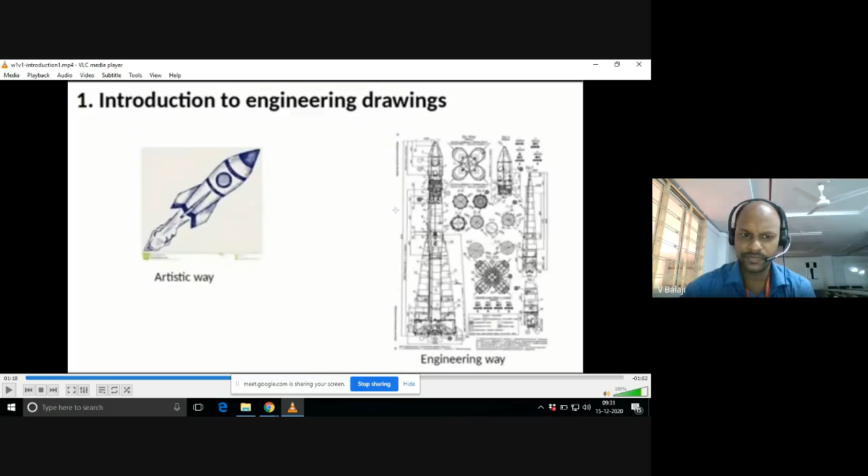Next we will see some other components. You might have seen a space station, right? There are so many things there. Suppose if you take a Skylab - internally there are a lot of parts.

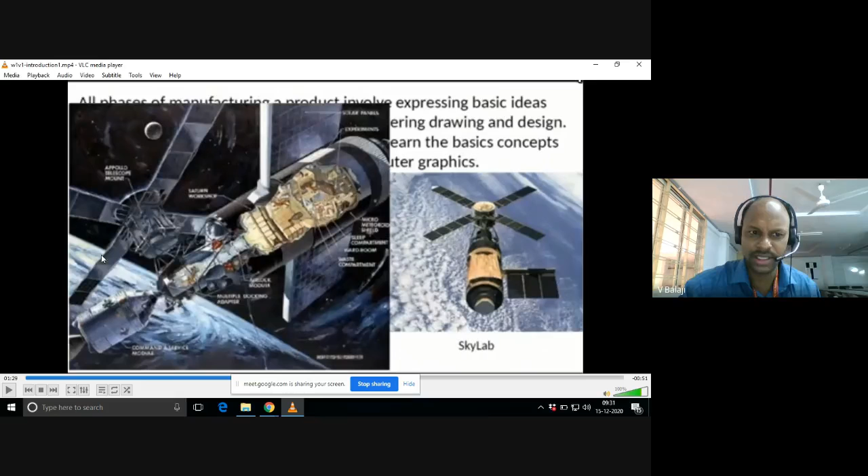Now wind farm - there is a big pillar type structure and three different blades. How much height it must be erected? What is the length of the blade? Thickness of the blade? Everything you need to prepare in detail on the drawing sheet. Then only it can be sent to the manufacturing department so everybody will easily understand in the workshop and go for manufacturing.

Now I wanted to read a few important lines. All phases of manufacturing a product involve expressing basic ideas into graphical format. Whatever is in our mind, we need to express it on paper - that is the graphical format. That's why we call it engineering graphics.

Widely known as engineering drawing. Nowadays it is engineering graphics. The present course prepares students to learn basic concepts involved in technical drawing skills and computer graphics. Whatever we are learning is nothing but preparing technical drawings. You will develop some skills, and you can also use computers - computer graphic skills you can develop in this subject.

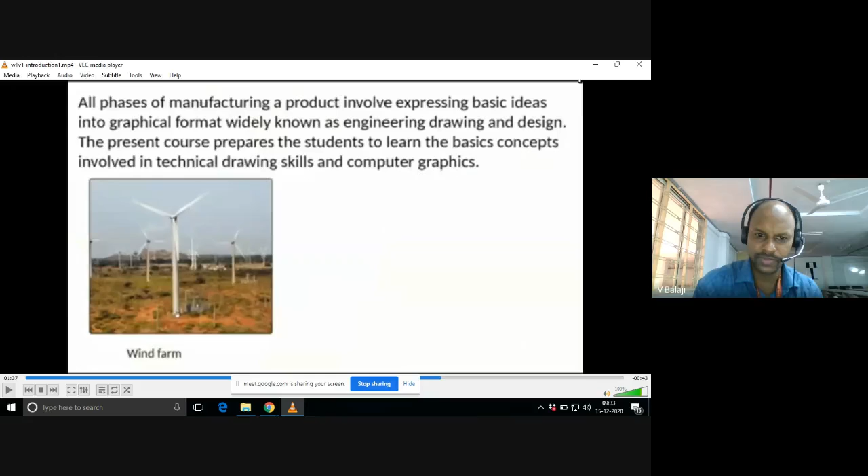Now I am showing you one more thing here - there is a wind turbine inside this particular windmill. Again, in the turbine you will find so many internal components, more than 10,000 components. Can you believe this? More than 10,000. So you need to generate manufacturing drawings with the help of some data.

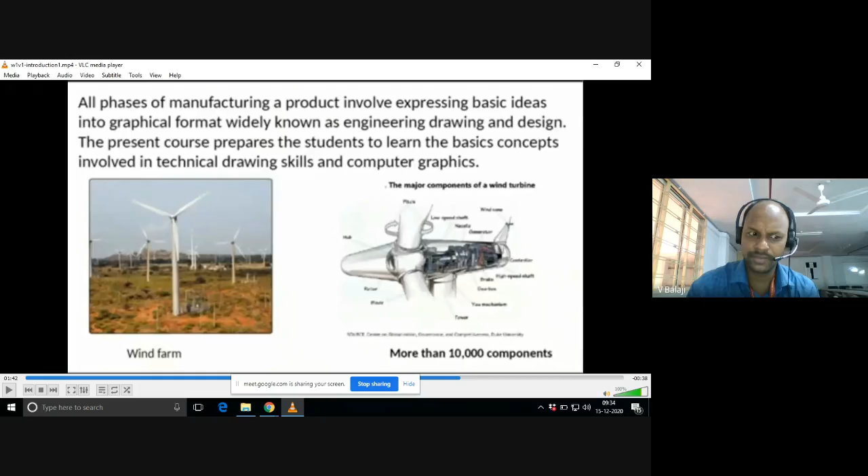Thereafter you can find some bridges. One bridge I am showing you here, which is the Bandra Worli Sea Link, Mumbai. You can see the detailed drawings here.

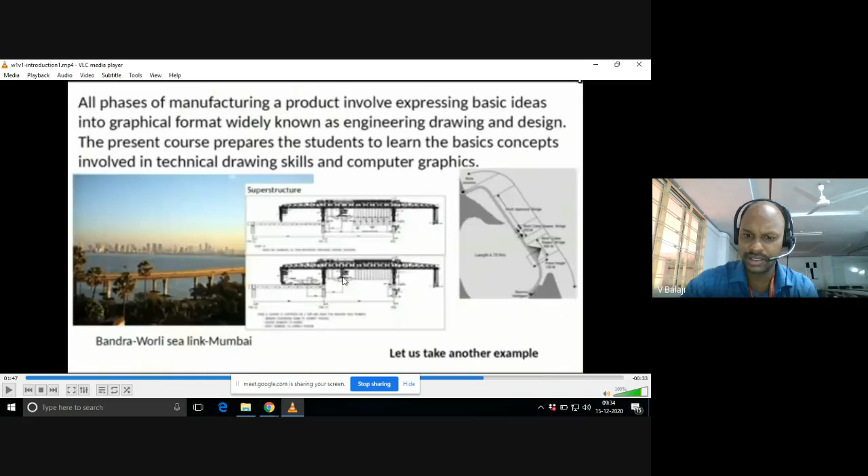Here is one more statement I would like to read for you. During this course, students will develop skills on understanding engineering drawings used in industries, computer design and development of 3D objects, and exposure to visual aspects of technical drawing. Visual aspects means what is front view, pictorial view, side view, top view - I have already discussed this - and other things reflected on the drawing sheet are known as visual aspects.

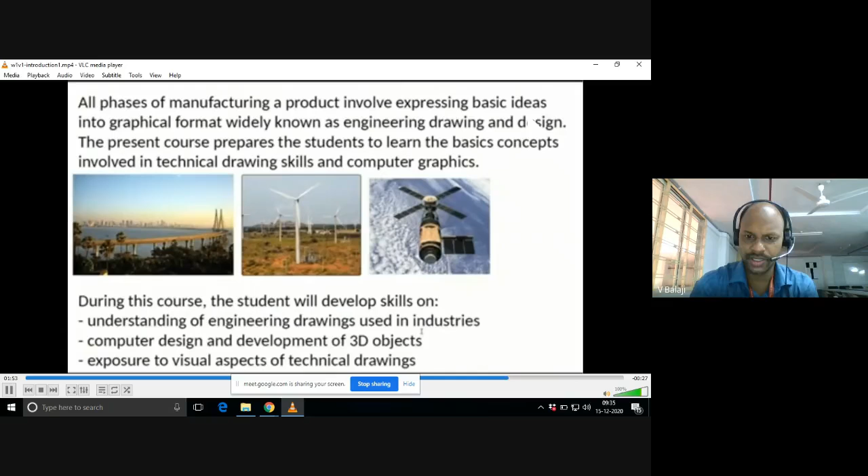I hope you would understand these important points. Do you have any questions here? No questions?

Sushmita asked: Sir, by which time should we buy all the instruments, sir?

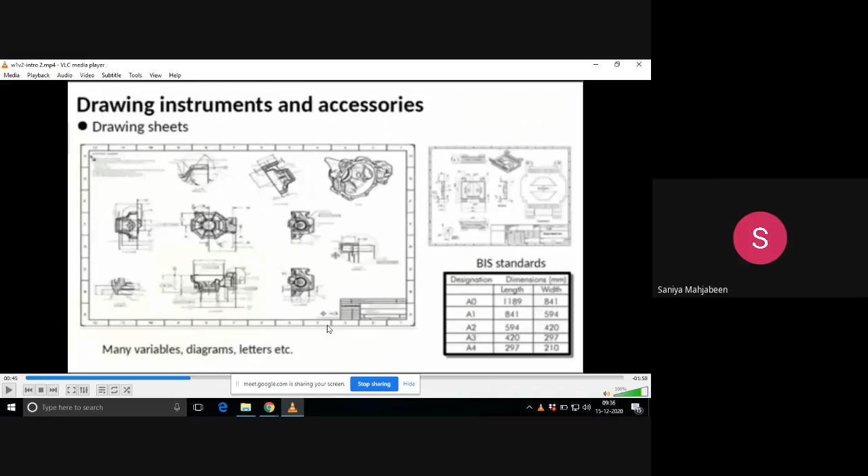Today you'll learn something about drawing sheets. The drawing sheet looks like this, and there are standards for drawing sheets set by the Bureau of Indian Standards. The designations of the drawing sheet are A0, A1, A2, A3, A4. You are familiar with the A4 drawing sheet.

If you go for a Xerox, in the Xerox shop, you can find this ordinary paper of 297 by 210 millimeters. All dimensions here I am showing in millimeters. In general, in our drawing, whatever I say, if I say 100, that means millimeters by default. So A4 is 297 by 210, A3 is 420 by 297, and A2 is 594 by 420, like that.

Now there is a relation between A3 and A4. A4 length is 297, and width is 210. But if you go to A3, the length is 420, which is exactly double the width of A4. See the relation here. And the width of A3 is nothing but equal to the length of A4.

You see the relation in the diagonals. So the length of A3 is double the width of A4, and the width of A3 is equal to the length of A4. Like that, the relation continues. You see, 297 to 594, and 594 is equal to 594. Again, 420 doubled is 840, like that. That means there is a relation between the sheet sizes.

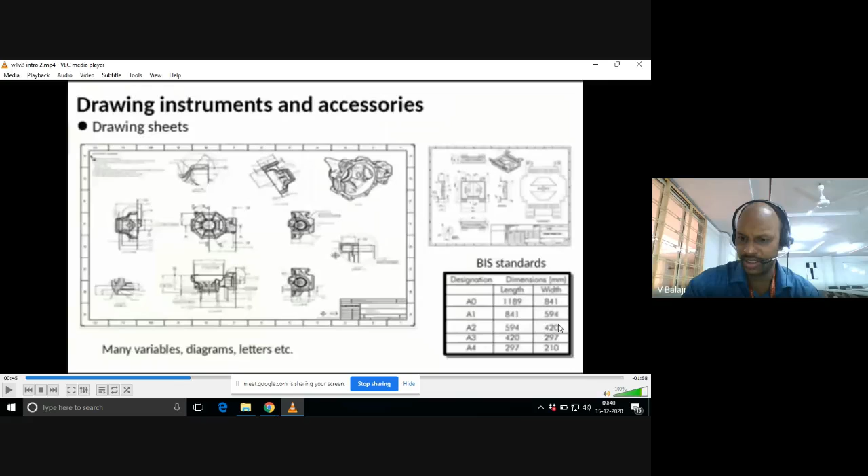The drawing sheet is in this rectangular shape, and there is a title block here. You need to write your roll number, name, date of drawing, and name of the drawing you are drawing on the sheet, on that particular day. So those things we will discuss in detail later.

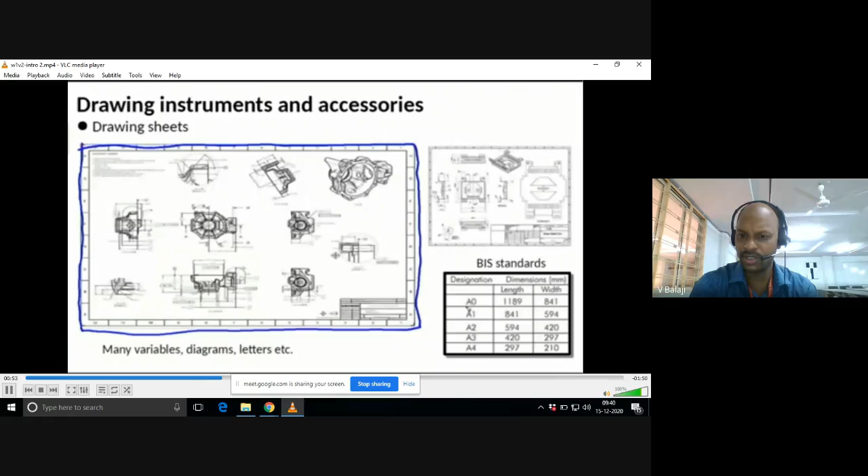So remember, these are the outline dimensions of your drawing sheet. Now I will show you: this total length is 1189, the total width is 841. Now whatever I am showing you here is of what size? What is the designation of this sheet? A0. Very good. But in our regular practice, we use A2 only.

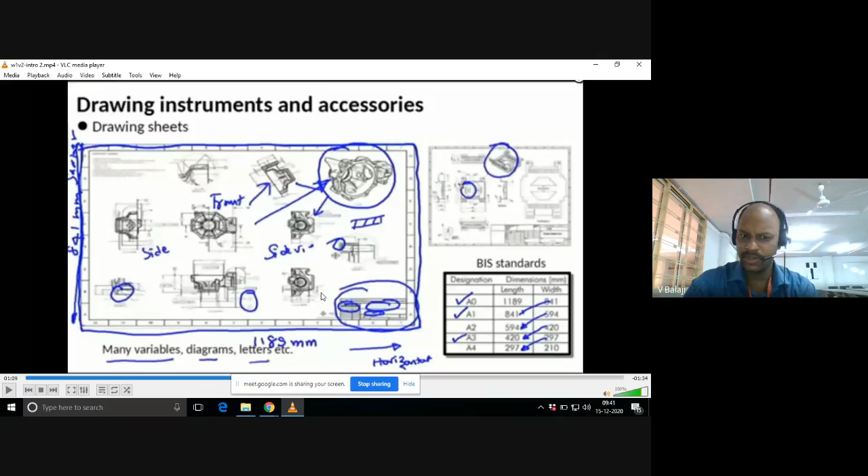A2 only. So there are so many applications, right? Engineering students, one application. For industry, people may use A0 size, like that. That varies, that depends.

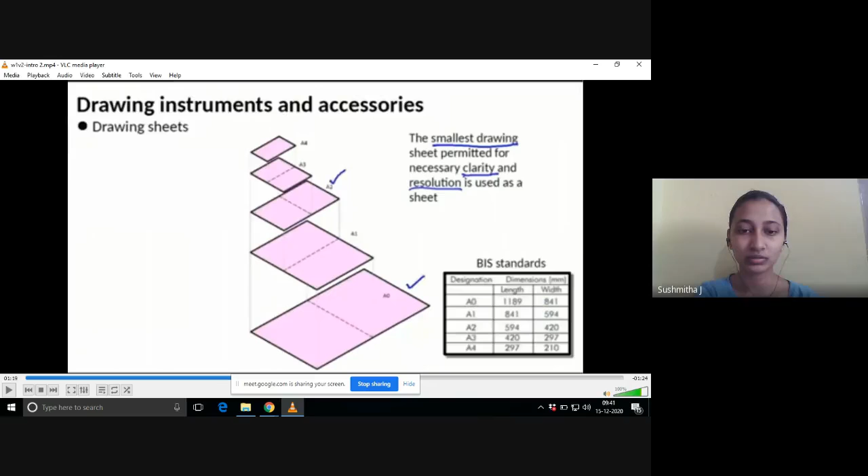Now I already told you there is a relation between A4, A3, A2, A1, A0. Which is the biggest size out of A4 to A0? A0 is the biggest size, and there are still smaller sizes like A5, like that. But here we are dealing with A4 as the least one.

Now I said A4 is almost half the size of A3, right? Now you can observe here. So A4 size is here. I said A3 length is equal to double the A4 width, right? So just you make it double. I've shown some dotted lines, meaning A4 - I have added one more A4 sheet to that, and the total becomes A3.

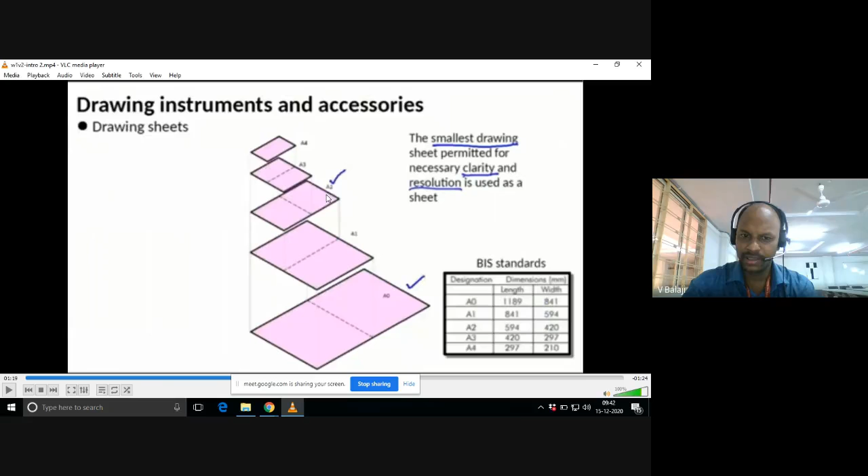Similarly, A3, if you add one more A3 paper, that becomes A2. Similarly, A2, and you add one more A2, you will get A1. So like that, if you add A1, one more A1, you will get... if you keep two A1 papers side by side, that becomes A0 size. So you need to remember this - these are the basic things you need to understand when you go outside.

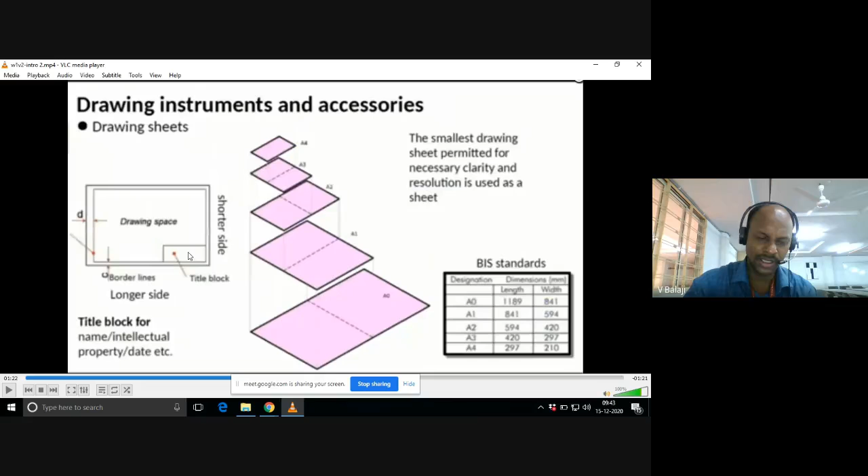Now here you see the thing. This is the internal space, the drawing space, and these are some border lines. And the total length, the longer side length of the drawing sheet - for example, A2 is 594. This is the total longer side, and 420 is the shorter side. And there is a title block here, where you need to write your name and everything.

To draw horizontal and vertical lines, inclined lines, and so many parallel lines - so many applications are there. This is the instrument we call drafter. You need to purchase this drafter. It costs around more than 500 rupees, less depending on the company. You purchase one good quality mini drafter, and it is placed on the drawing board. On the drawing board, the drawing sheet is attached, and on the drawing sheet we keep this mini drafter fixed to one side corner of the drawing board. This is the arrangement.

Now coming to the drawing board sizes. Drawing board is also having sizes, right? Different sizes.

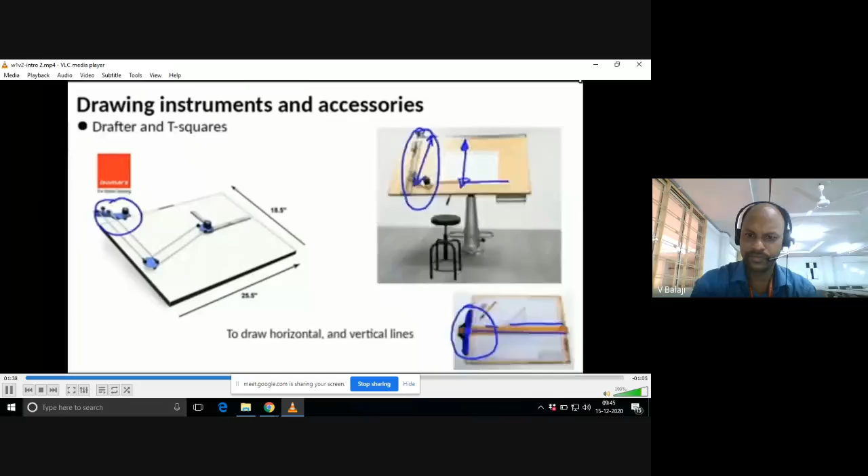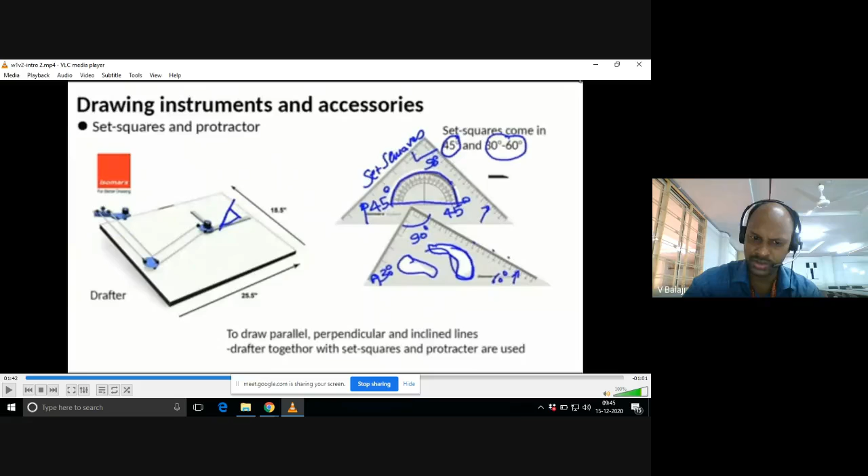Here you see some curve type of hole is there. It is generally used for drawing special curves. And you will find in the market French curves also for drawing special curves.

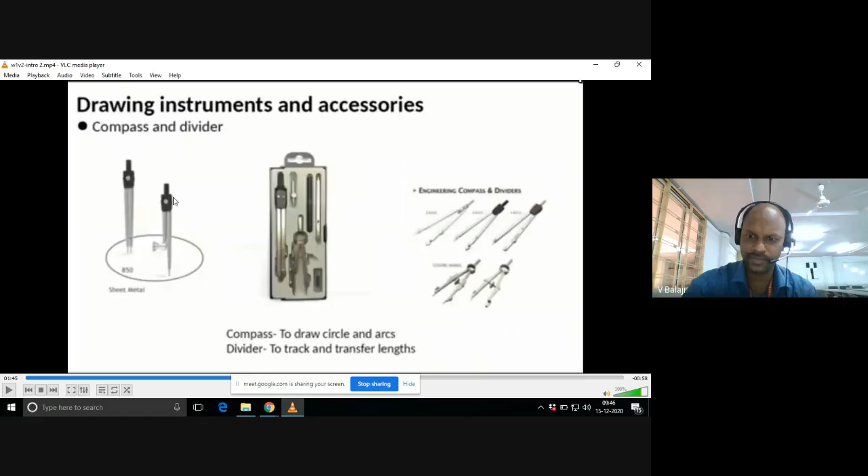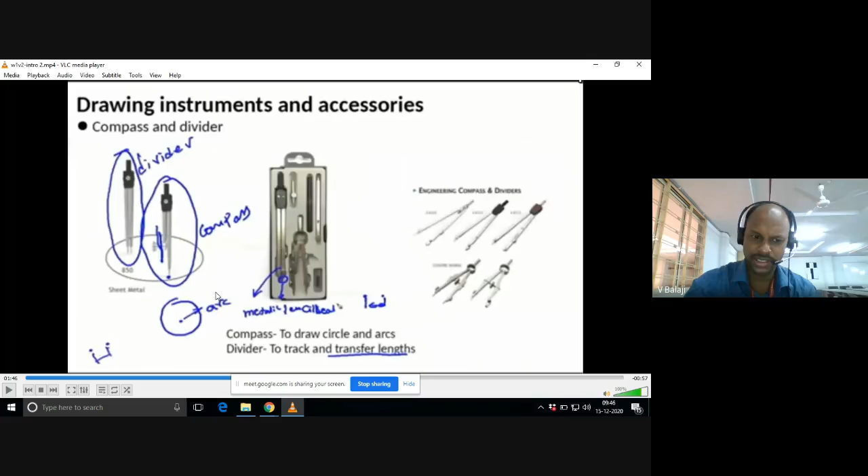What is the application of this compass? You can draw arcs, right? You can draw arcs, circles, like that using this compass.

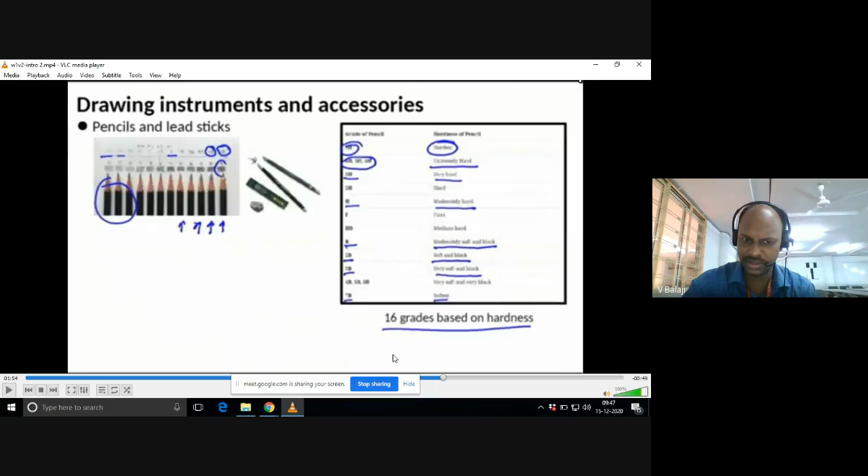Now coming to other accessories like pencils. We use only 2 pencils, maximum 2 or 3 pencils. Actually, there are 16 grades of pencils according to the hardness of the lead. Lead is generally made up of graphite, right? So graphite has different hardness because of the manufacturing process - it has different hardness, so accordingly it is divided into 16 grades. But we use only a few types.

Here the recommended grades are 3H, 2H, H, and HB. Out of H, 2H, 3H, you can purchase H in the market - that is sufficient. And HB is also important for us. So you purchase HB pencil and H pencil. The purpose is HB will be used for drawing dark lines, and H is used for drawing light lines or curves. So these 2 pencils are sufficient for our regular practice.

So if somebody asks you why we are using H and why we are using B grade or HB grade, you have to say that there are 16 grades based upon hardness, and according to the drawing sheet, drawing board, the A2 size we are using, and the drawing board material being soft wood, this is recommended for engineering students. You need to explain all this concept.

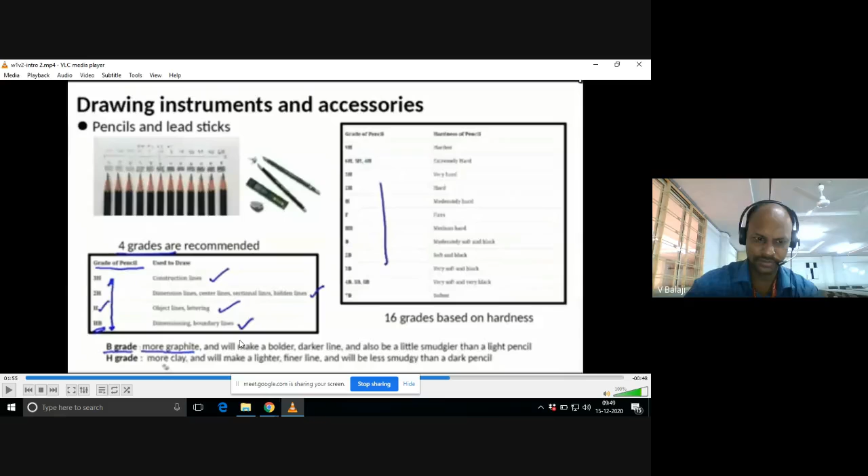Please avoid using any sketch pencils or other grades of pencils. Don't use extra hard, extra dark pencils, don't use such brands, and don't use pens also because you are at home. Try to use all the available material, but use it appropriately according to the standards - then only you will get the proper sharpness of the lines, visibility, and a good impression on the drawing sheet.

And among drawing instruments, a French curve is generally not required - we generally use freehand. To make it fast, some people use these French curves, but it is not required for our regular practice.

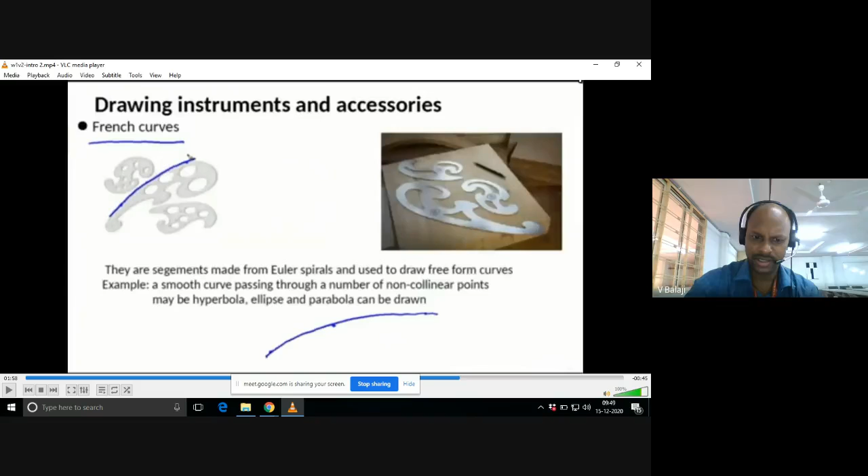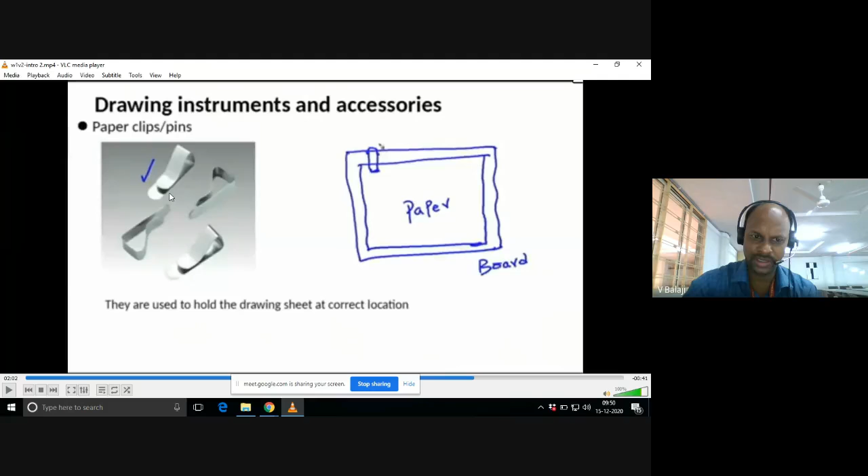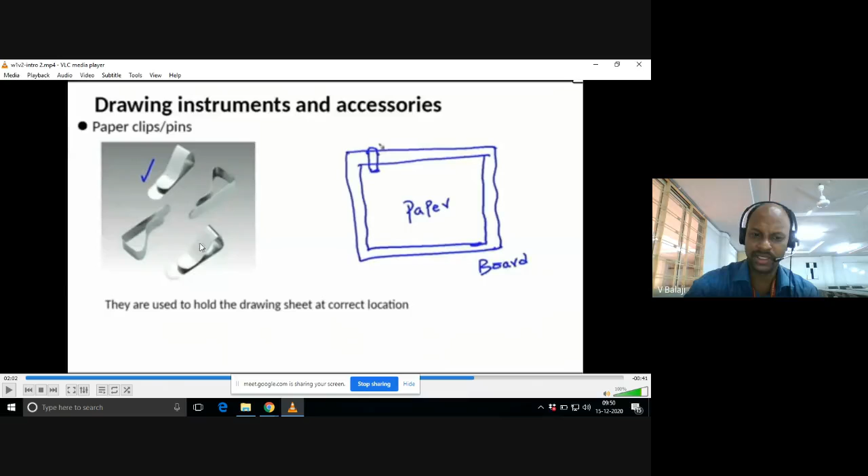Now, how to fix the drawing sheet on the drawing board? We need clips. These clips are made of steel or plastic. You can buy any steel or plastic, but steel is better since it has small thickness, so you can easily fix it. So to fix the drawing sheet on the drawing board, we need clips like that, you have to fix it.

Now anyway, sandpaper to sharpen the pencils, right? Eraser, sharpener, everything is required as usual.

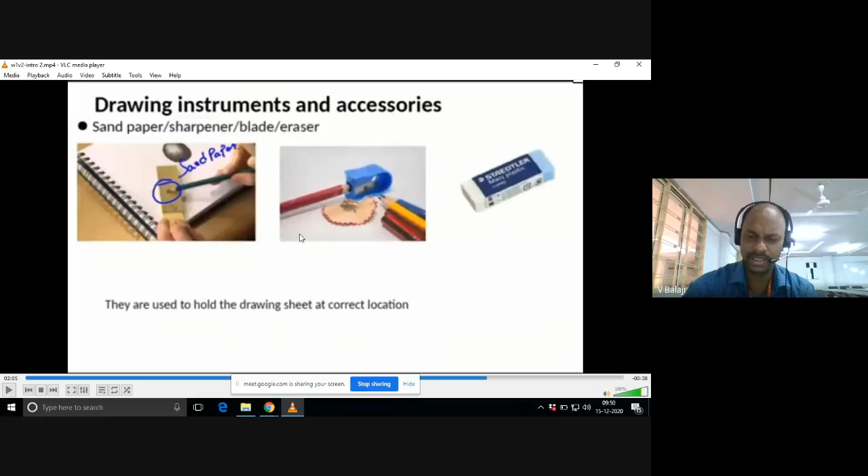Okay, and madam has told you letter styles, right? Generally, strictly speaking, if you want to maintain all these ratios, height to width ratio of letter or number, it is very difficult in our regular practice all the time. So initially you practice, but later on you need to write all these things freehand only, to save some time. So practice. It is always good to write freehand writing with good handwriting.

Develop the writing skills also, because when you write some letter, suppose I have written here ISO - if you write with freehand, that reflects you are using some standard, some ratio. That impression should be there. Don't write cursive writing or something other writing here, that is not accepted.

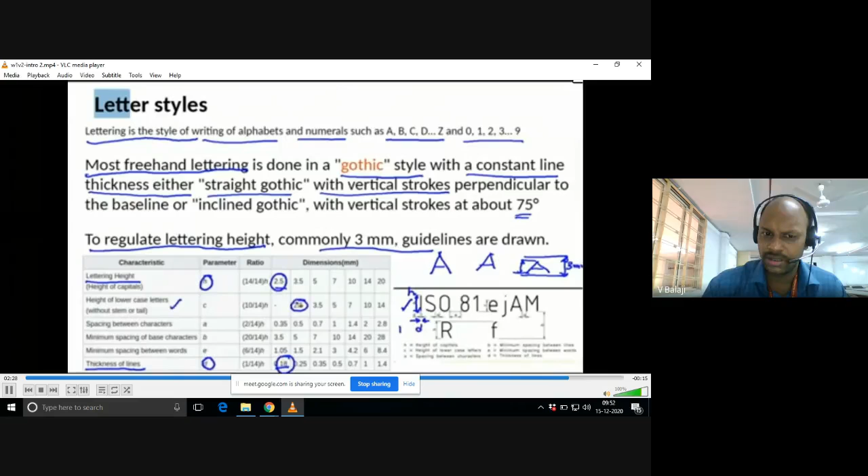So this is as far as letter styles are concerned. You need to go by freehand writing only. You can refer any standard textbooks and you can follow the letter styles, but always mostly freehand lettering only is allowed in the drawing, because it reduces the time.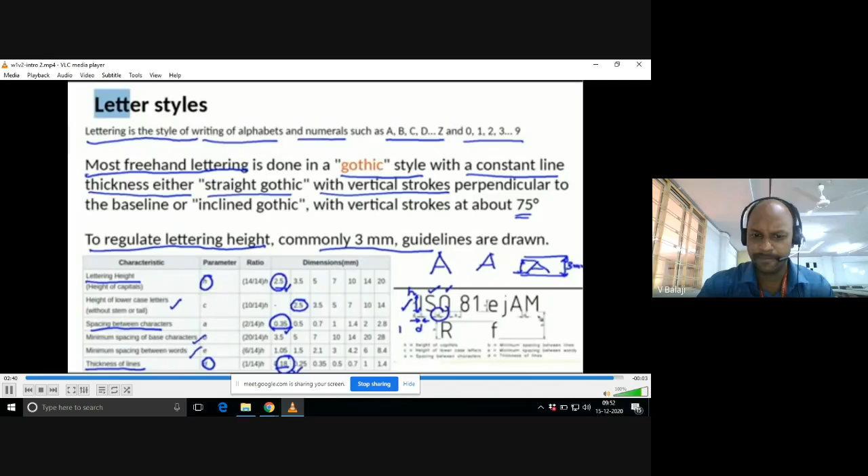Now, I will share lastly one more video I would like to share. So till now, how many instruments do you need to buy? The first one is the drawing sheet. How many drawing sheets are required? You buy initially 10 drawing sheets.

Sir, are you telling us to buy the normal drawing sheets or the engineering drawing sheets? Engineering only, I said na, size A2. Yes sir, A2 size, engineering only. Next, mini drafter - good quality mini drafter, and one compass.

And 2 pencils, HB. Understood? And thereafter, clips to fix the drawing sheet on the drawing board. Better you go for steel clips. And white tape is also there - sometimes you need to fix the drawing sheet to the drawing board with white tape, because you can only fix three corners with drawing clips. The fourth corner is not possible, so you need to use white tape to fix the fourth corner. What else? Sharpener, eraser, that is common, right?

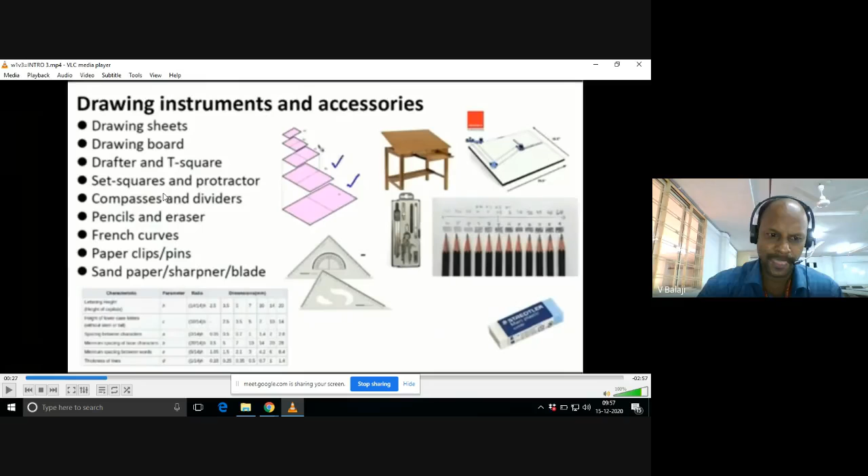Keep one compass with you. Fix one pencil to the compass all the time, and don't disturb that compass. Also get 2 types of set squares. You can buy a separate protractor too.

Some standards are there, I already told you. So what is the layout of that standard? We will discuss a little bit here. There are so many standards like ISO, SAE, ASTM.

So the standard means, the drawing sheet is something like a rectangular shape, right? There are border lines, a title block, and so many other internal grid lines. All these are arranged with the help of some standards.

There is a meaning for each standard. Why is this center marking there? Everything has a meaning. So if I draw one title block here, you should not draw it as you wish. There is a standard height and length of the title block, and there are folding marks here, and four center marks. So for every line, there is a meaning.

That is the meaning of a standard sheet layout. These are organized by some standards, ISO or ASTM. We are not that much interested to dig into all those things, but for everything, whatever the drawing sheet is prepared and designed, there is a meaning.

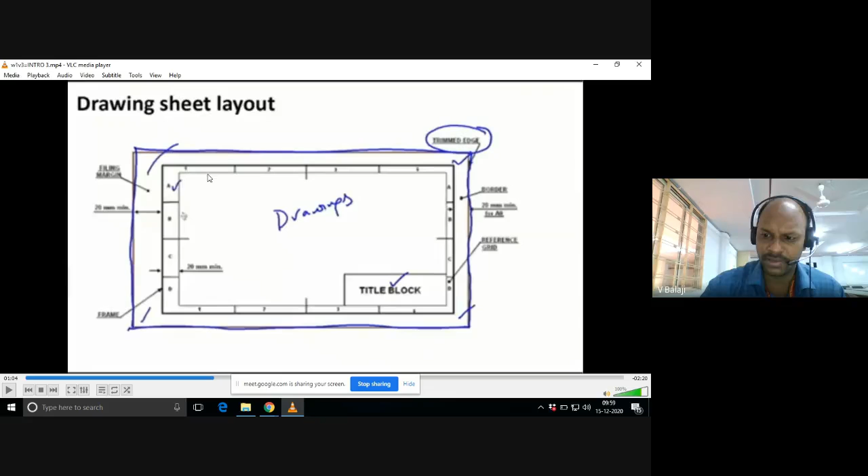So that is the drawing sheet layout. In detail, if you want to know what ABCDs and 1,2,3,4s are, you can refer to any standard textbook. For example, if you draw one sketch in between AB space, and in between 1, 2...

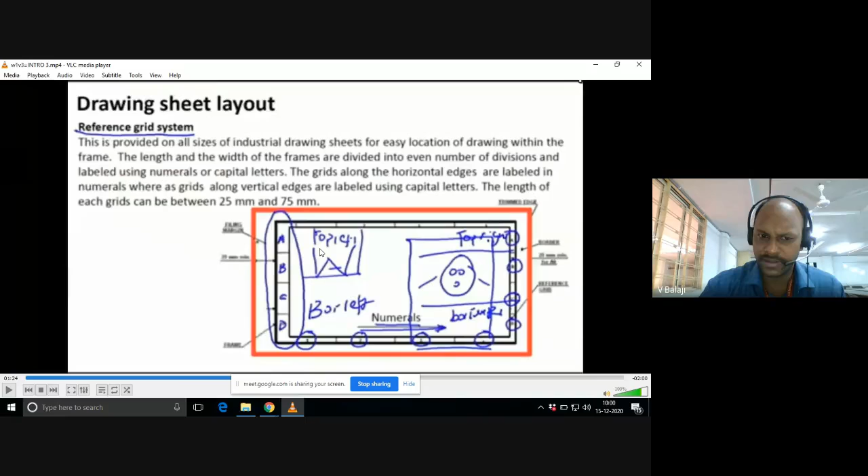There are so many drawing sheets and n number of drawings in a particular drawing sheet. If you want to locate or trace one particular object, simply I will say AB 1,2 — so in this particular area, that drawing is there. That is called a reference grid system or drawing sheet layout.

Such knowledge may not be useful to you directly, but you need to know it at least.

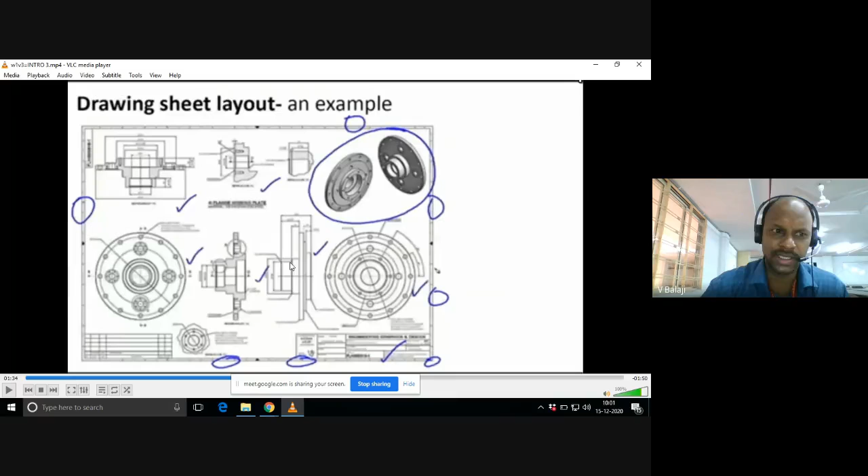In the drawing sheet, there is a title block and so many component drawings — a 3D picture, 3D representation, and its front view, side view, top view, and other internal parts. To locate a particular drawing, I can say AB 1,2 or CD 3,4, so in that area the drawing is prepared or located, and you can easily trace it out. That is the drawing sheet layout.

Otherwise, there is no advantage.

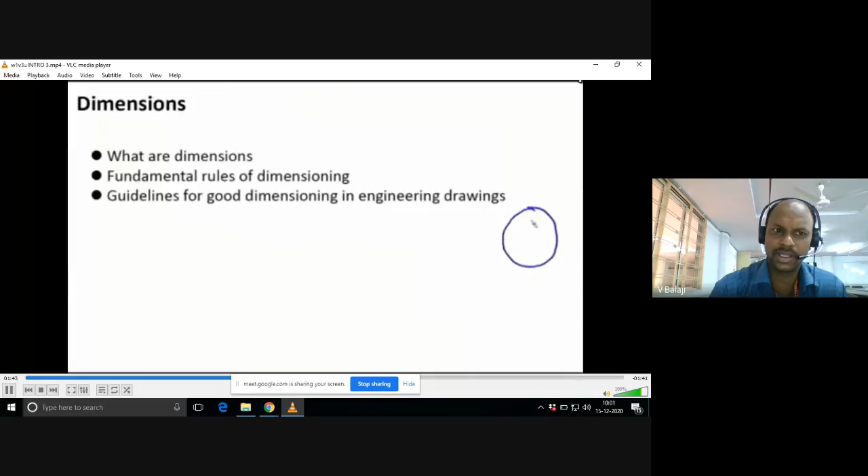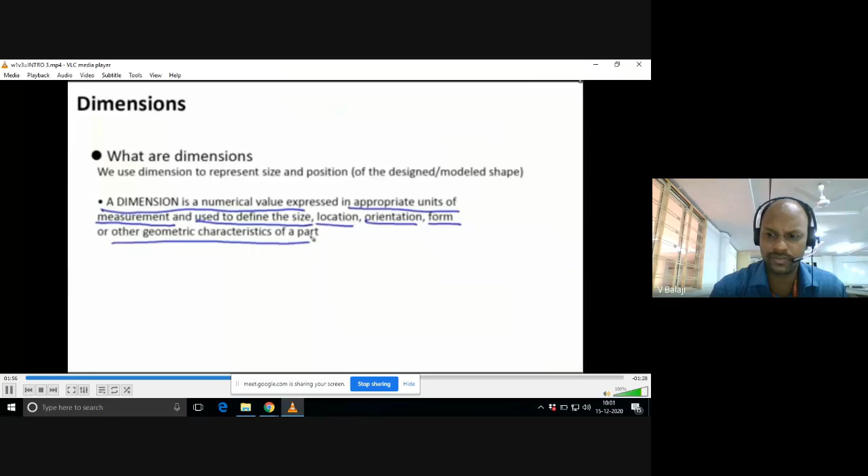Okay, the next important topic is dimensions. I think we are having one more class, right? Not today, sir.

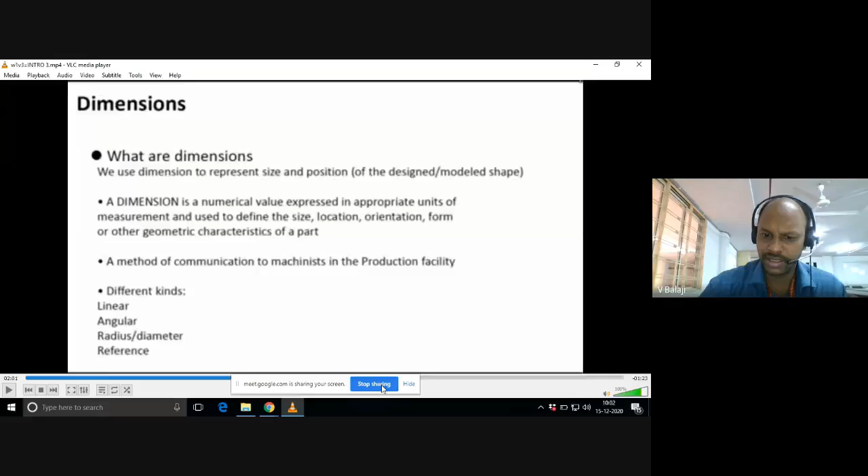Okay, so we will continue with the dimensions in the next class. If you're thorough with all these basics, then we can practice the first unit directly. Maybe in the next class you come prepared with unit number 1 material, which I have posted on Google Classroom. Read the PDF material and watch the videos posted to your Newton account, then come prepared for the next class. I thank you once again for joining, and we will continue in the next session.